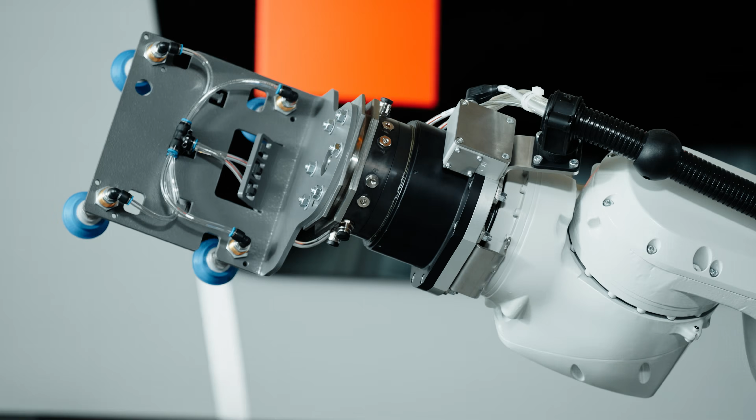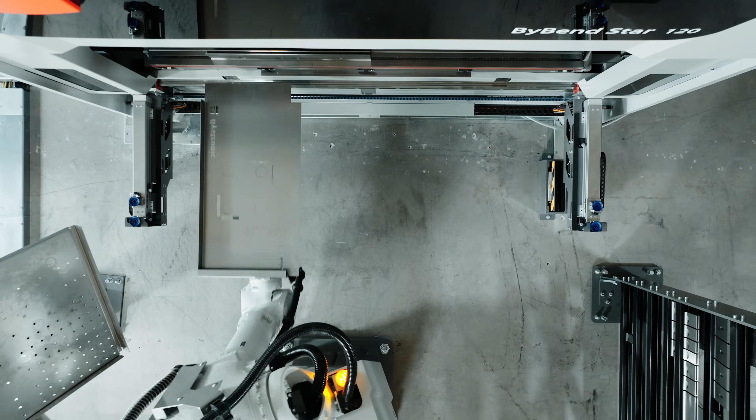Today I'd like to present you a one-of-a-kind machine. But actually, it's not only about the machine anymore. There is much more to being successful in the sheet metal business.

Automation is a pillar in a lot of companies' strategy, and finding skilled labor in manufacturing becomes only increasingly harder. But don't worry, Bystronic has been a technology leader in bending automation since the 2000s, and our core message stays the same: make automation easy, productive, and with the highest standard of quality.

Bystronic has press brakes and bending cells for worry-free sheet metal bending automation, which cover heavy-duty jobs but also work in confined spaces. New to the bending family is the ByBendStar 120, and it fits perfectly between the small and the large size press brakes. And now we placed it here.

This is our new Bycell BendStar M. The M stands for mid-size, which are parts up to 1200 x 800 millimeters and up to 35 kilos in weight. To ensure lights-out operation of the bending cell, we equipped this machine with some pretty cool features.

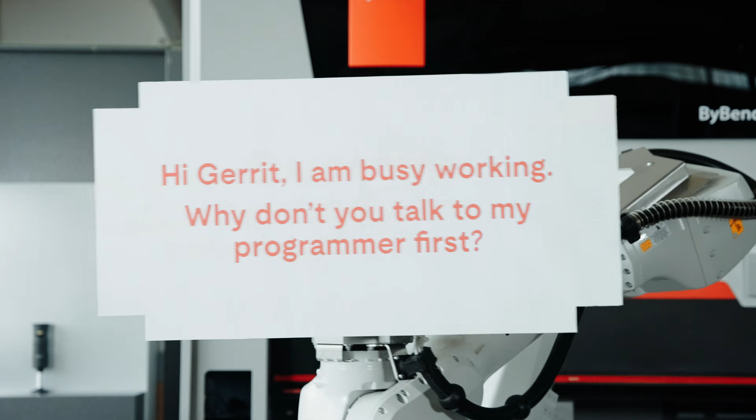But before we have a look into that, let's talk to our operator. Hello, Mr. Robot. Not the most talkative guy, but okay.

Let's dive into programming. Hi, Marcel. I get it, I actually got some time for you. I'm already done with my program. Well, looking at your screen, that looks pretty easy to use. Can you show me? It is, because we're using the same bending program as we use for the press brake, also for the robot. Now, what makes the programming so easy?

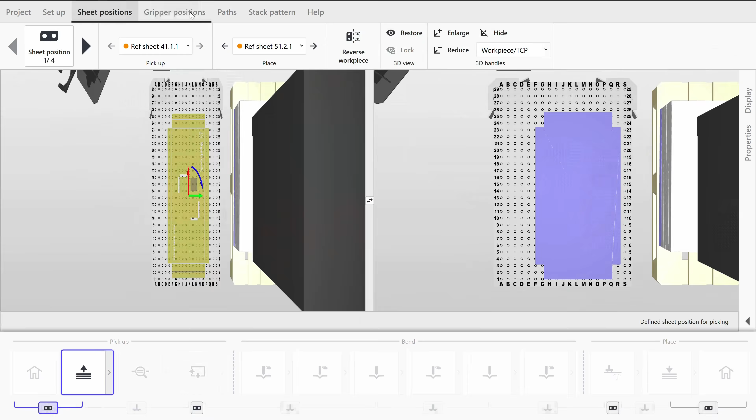Instead of moving the robot, we are actually just moving the part, and the robot follows our motion. So we can see here when we are changing the gripper, it gives me a full 3D preview of what that change means in the robotic program.

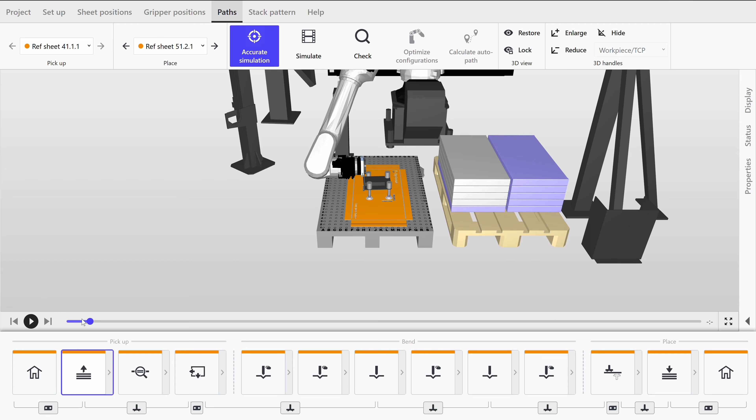There's a couple other features that we added to the software to make it easy. For example, an accurate simulation of any collisions in the program itself. We can optimize some of the robotic movements automatically, but the biggest feature is the auto path calculation, where the software can automatically calculate the robot movement that is required for the next step.

Once I'm done with my program, I can do a quick check if everything looks good. And for my stack patterns, when I start programming them, I only have to program one part. After that, it's easy copy and paste. That's how easy the software is.

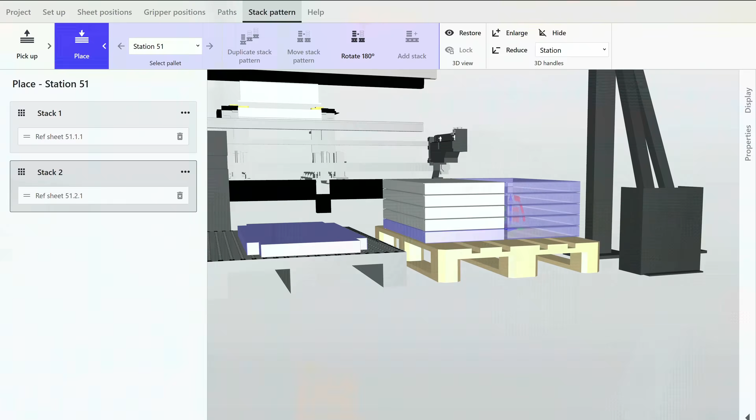Before bending a part, the press brake needs some tooling installed. Our bending cell comes with an automatic tool changer, which does that perfectly every single time. There is absolutely no programming involved, it's all done automatic. Sometimes you might require a special tool. You can always and easily insert special tools manually. No problem at all.

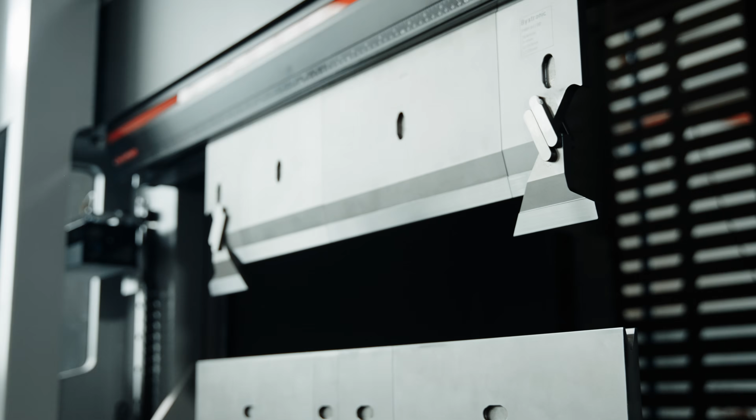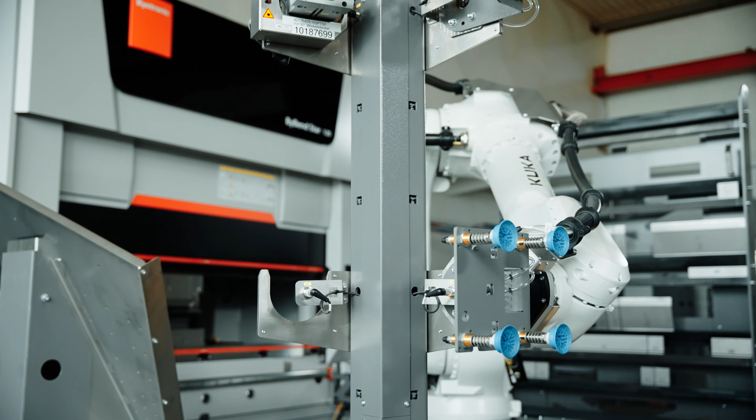To switch between different jobs autonomously, you also require a gripper changer. Our bending cell comes with a vertical rack equipped with the latest RFID technology to ensure that we always select the right gripper. You can store up to 6 different grippers in this gripper tree, and of course you can exchange them for different ones too.

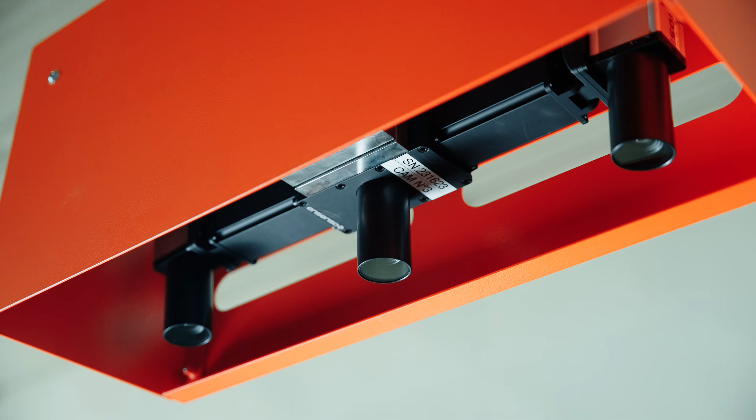Absolutely impressive, isn't it? The latest feature we added to our technology stack is the optical part detection. With this vision system, we can recognize if the right parts are in the cell, and even if the stacks have shifted, the robot can automatically reposition to pick up the parts correctly every single time. It will also tell you when the stack is empty, and you can skip the complete referencing cycle.

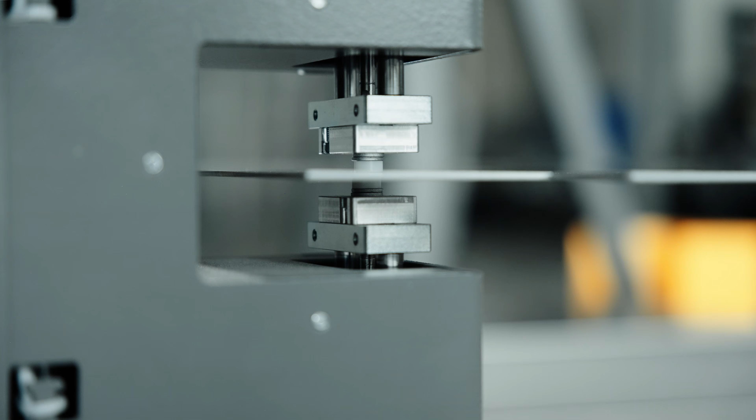Once the robot picks up the part, we have the possibility to automatically separate sheets by using a brush or a magnet, depending on your material needs. If for some reason sheets still stick together, we have a double sheet detection that will alert you when this accidentally happens. Quite smart, what do you think?

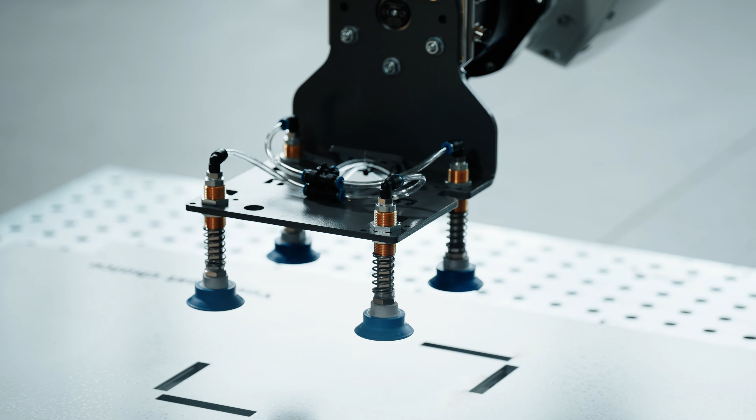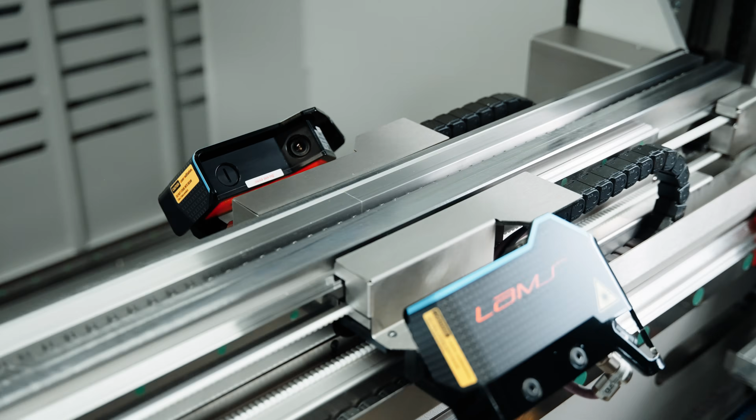You might remember the camera system from our ByBendStar 120. This laser angle measuring system, LAMS, is crucial for autonomously bending parts. It guarantees all your bending angles come out perfectly without the need of an operator intervention.

The robot can actively follow parts. Based on your gripper type and application, this can save valuable time. We also integrated the regrip station directly in front of the machine to eliminate any unnecessary repositioning time during the bending cycle.

We know that one automation size does not fit all of your requirements. That is why we decided to make this system modular so it can grow with you and fulfill your specific needs. Whether this means a conveyor, a storage connection, or any customization to utilize this cell to the absolute maximum.

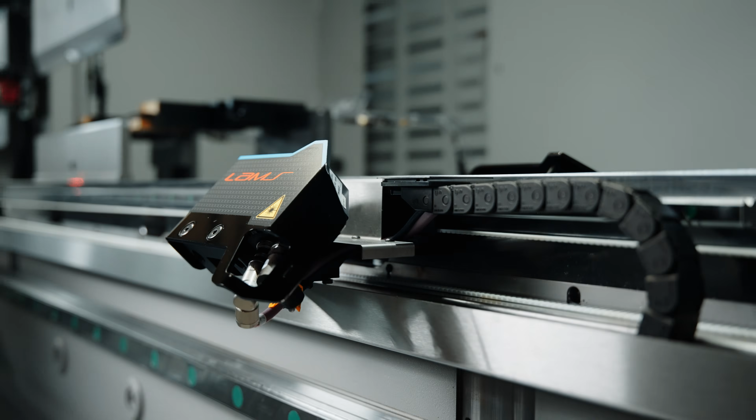Deciding on the perfect bending automation for you may seem daunting, but we are here to help. At Bystronic, we have a dedicated team to analyze your parts, your workflow, and requirements. Together, we are your best choice.